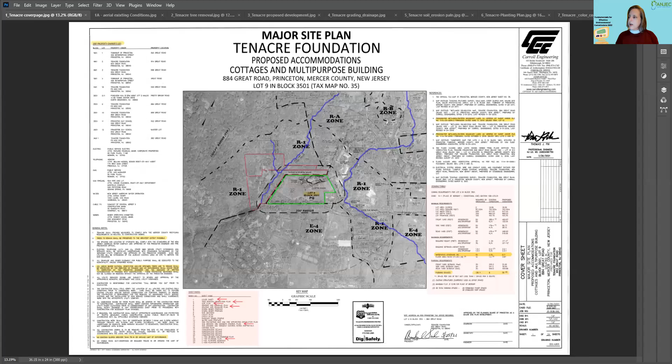So this is a site plan from Princeton that we're going to review this evening. I'm going to give just a little background on the site.

The project is a mixed-use project with education, residential, and office use. The proposed development consists of a multi-purpose building community center with 350-seat seating, 3 residential buildings, a pedestrian walkway, a new access drive, and some parking lot areas. The applicant is a Tenacre Foundation.

They actually have a site. Let me just hold one second here. I'm trying to get a spotlight here.

There we go. Here's the map of where the project is going to take place, in this little green area. This Tenacre lot is actually over here. Let me enlarge this a little bit so you can see it a little better.

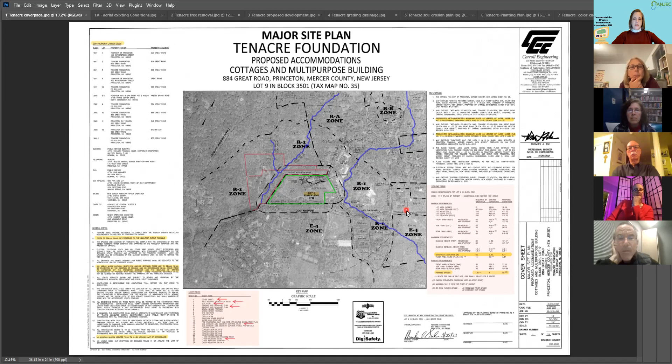This lot over here, they actually have a campus where they have a Christian Science nursing care facility and a school for Christian Science nursing. So they want to expand into this area here for some additional housing for visitors and for educational purposes.

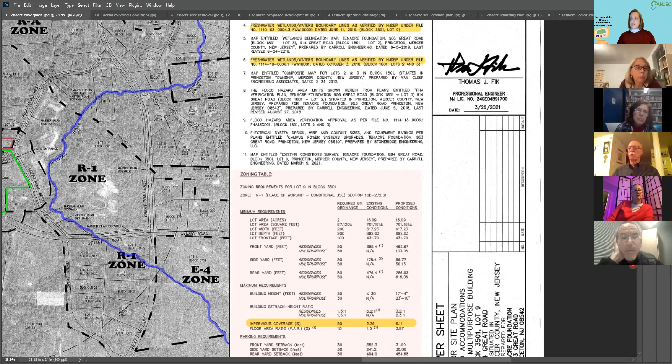So we're going to get into some questions now that I'm going to ask, and I'm going to kind of move you around on this map so we can try to answer those questions. When I pose the questions, if you can answer them, please just unmute yourselves and step up with the answers. First question is, over here on the right-hand side, it tells you what the lot is.

So I'm going to ask: is the proposed project consistent with the R1 zoning designation? Because this is a residential 1 zoning designation. Based on what's here, can anyone answer that question? Would this be appropriate development for this zoning area? Any takers?

Yeah. You said it was supposed to be cottages and like an office building that they wanted to put up? Yeah, cottages, office building, and a multi-purpose building for like educational purposes.

And they are considered a place of worship. They are. Okay, yeah, that's what I was going to comment on. Yeah, okay, yeah, they are considered a place of worship. It's Christian Science, so...

As you can see here, it's zoned R1, which is residential, but a place of worship is a conditional use based on their ordinance. So it is an appropriate development that would be accepted for this particular zoning. So that is the answer there.

I'm going to scroll back out here a little bit so we can move over to the map portion. This isn't a very good map, and I'm going to show you an aerial view in a minute. But the next question would be to look at the map. Do you see any environmental concerns that are actually outside of where the proposed development is going to take place?

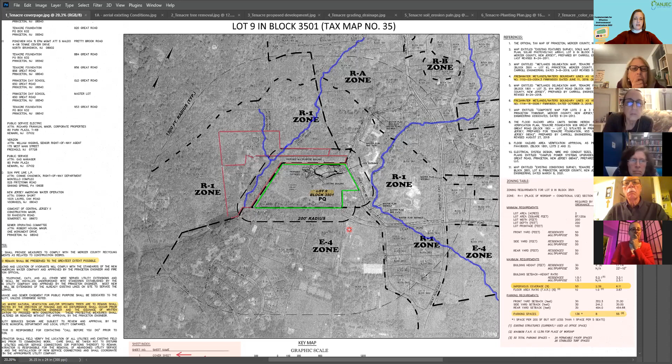I do have this a little color coded to make it easier for you. I'm going to scroll in. If you see me going towards the screen, it's because I have a touch screen, so it's easier for me to enlarge things using my hands. So are there features outside of the lot that you can see that you'd want to take into consideration with environmental concerns outside the property?

Does anybody have any? It's in a watershed of some kind, riparian buffers. Yes, exactly, erosion. So they're very close to a creek. Will there be pollution? Will there be sediment coming off of the development? Yeah, all good points.

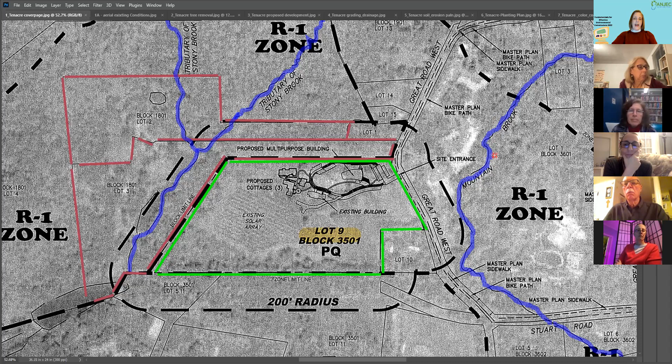Yes, and in fact, there is some, you wouldn't know this just looking at the site plan, but these tributaries, this Stony Brook tributary here, and this Mountain Brook tributary, they actually both flow, although I don't have it completely shown here, but both of these tributaries flow into a C1 waterway, which is a protected waterway, so you don't want any additional pollution going to it. So that is a concern. It's absolutely correct on that.

So you want to look to see if there are C1 waterways in the area, because C1 waterways constitute the need for a 300-foot buffer around waterways that are considered C1, the waterway itself and tributaries to that waterway. So once we get a little deeper into the plan, you want to make sure that there actually is that 300-foot buffer around these waterways.

Is there a legend that shows the scale of this, so that we know how close that is to the waterways? Maybe not on this particular map, because this is just the cover sheet, but when you get farther into the site plan, there are scales there.

But see, the waterways themselves are actually outside of the proposed area. This is something you probably would have to go to an online map for, because the site plan itself is only going to specifically look at what's happening in the development area, which is inside the green area. These waterways are outside of that property. So this is something we see on the overview, but you probably want to look at in more detail on your own using online mapping or other sources that may not be in the site plan itself.

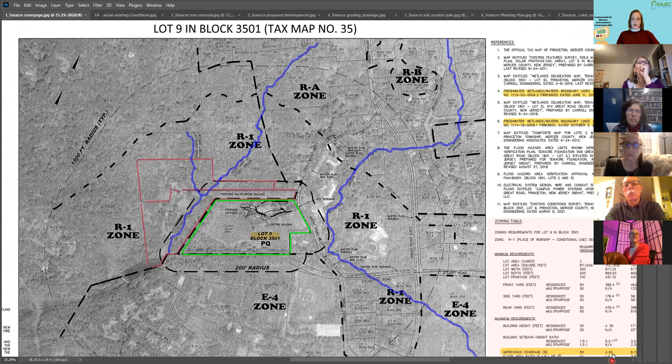Okay, so next question, let's see if I can move over here. Okay, so this is the area where it shows what the ordinances in your town require, what the existing conditions are, and what the proposed conditions are.

So is there anything here where you see that might be looking for a variance for the requirements by ordinance? I made this a little easier because I highlighted some of the areas. So if there's anything you see... Parking is a big thing. Yes, exactly, correct. Right here with parking, there's actually a little asterisk. The required by ordinance, based on what they're proposing in this development, they need 136 spots. They're only proposing to have 55.

So they actually are requesting a variance for this, and they were granted it. Primarily why they were granted is because it's temporary housing there, so they're not going to require as much parking area. Plus, as I mentioned before, they have a campus right across the street where they have additional parking, and they would supply transportation back and forth to this location if there are more people going to the multipurpose building for an event. So they don't necessarily have to have all the parking on site because of the campus across the street. They've been granted a variance for that reason.

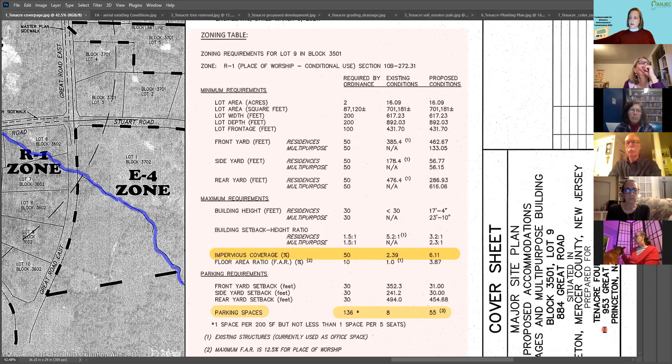Okay, going on to the next thing. All right, let's see, it's hard to do this. Michelle was supposed to be here asking the questions, so I'm trying to both maneuver this and ask the questions at the same time, because she somehow got kicked out of the session.

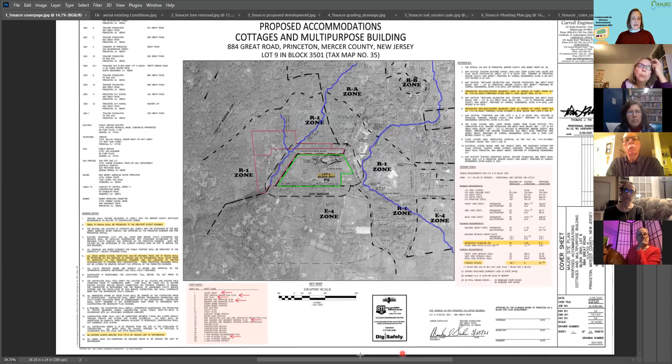Anyways, the other thing you want to look at is whether all the required permits have been obtained. Now, it's usually on the cover page - there's somewhere on here where it shows what permits they need and have gotten.

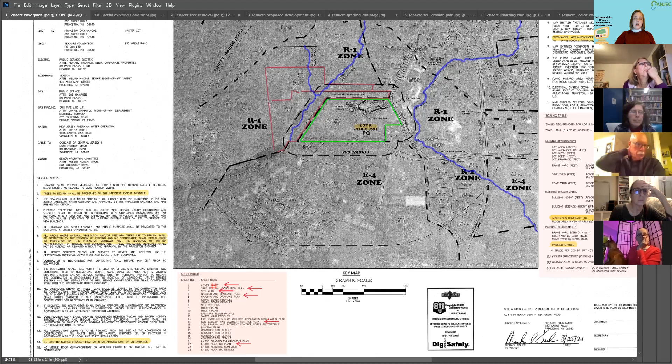On this particular plan, it doesn't show what permits they're going for and what ones they have, because usually that's in the general notes. So this is something you'd want to ask the developer, because if there are wetlands there, they're probably going to have to get state permits to do the development, and it's not indicated on this plan.

The other thing I wanted to point out is, come on, it's scrolling for me for some reason. Let's see if I can do this.

We did mention that there look like possible wetlands in the stream buffer here. It looks like they did get a letter of interpretation, verified by the DEP for the wetland boundaries for the lots alongside the property, which I highlighted here in red. So they already have that in place, so they're good there.

They are a little dated, so they might ask the DEP to go back out and verify that, because this application came in 2021, and these boundaries were verified back in 2018 and 2019. So this is something you might want to verify, having the DEP re-verify those freshwater wetland boundaries.

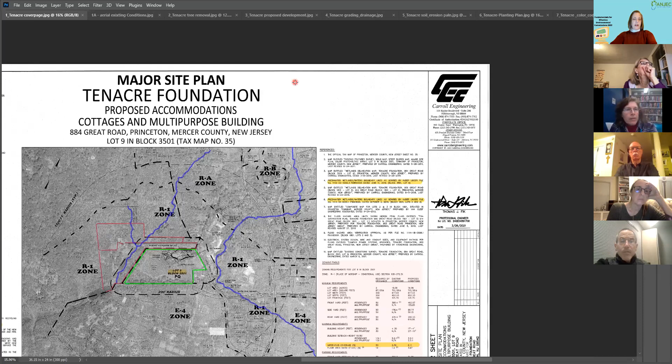Okay, so that's basically the main page, and you can see on the bottom here there are a lot of different sheets that are part of this plan. We're not going to look at all of them. I've selected a few that we'll look at in a little more detail, just to give you an idea of what you need to go through during a site plan review.

All right, so I'm just going to show you this. This is the actual aerial view, a better overhead view of what the site looks like now. There's a solar array as part of the property, an existing building here, a garage, here's the driveway coming in, and there's an existing bioretention basin that's part of the property. So this gives you an idea of what is currently at the site, just a visual for you to see.

Okay, let's go on to the next page. I have to move my questions here. Here we go, all right.

I made this a little easier for tonight's review, as I tried to color code this property. This is actually the tree removal and demolition plan, but it also shows the existing conditions of the site. I'll give you the color coding: yellow is wetlands areas, blue is a bioretention basin.

So the first question is, are there freshwater wetlands on the property? This should be a pretty easy question, since I just gave you the color coding. Yes, there are - all the yellow area. So the wetland on the bottom part of the property here, and up on the northwest and north part of the property here. Let me scroll in a little bit more so you can see this is the wetland area.

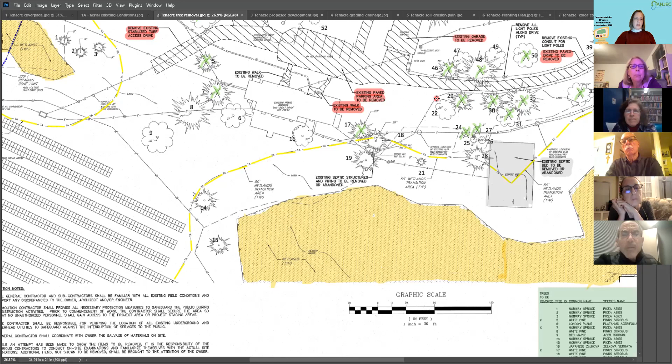Okay, so let me go to the top part of the property here, if I can - come on, scroll. My mouse is not working for some reason. You have to just be a little patient with me, it's a little difficult to maneuver around these maps.

So the other thing is up here, and I already kind of gave this answer away. There is a marking here that's a riparian buffer zone - a 300-foot riparian buffer zone. What would constitute needing a 300-foot riparian buffer zone? I think I already gave it away in the initial front pages - C1. Not the wetlands, it's the C1 waterways. Yeah, for that you need a 300-foot riparian buffer.

Most waterways, like a normal waterway, you need a 50-foot buffer. If it's an exceptional waterway, then 150. But if it's a C1 waterway, you actually need a 300-foot riparian zone. This should be part of your ordinances also, especially if you have a riparian protection ordinance.

It should be stated in there, but these are state regulations also. Can I ask a quick question? Will the site plan indicate on it... I'm totally new to this, I just joined the Environmental Commission two months ago. The only time I do site plan reviews is when I'm presenting this, so I'm not that familiar with them either. Do they normally indicate on them, oh, here's a wetland, here's a C1 category, or do you have to know that those things exist?

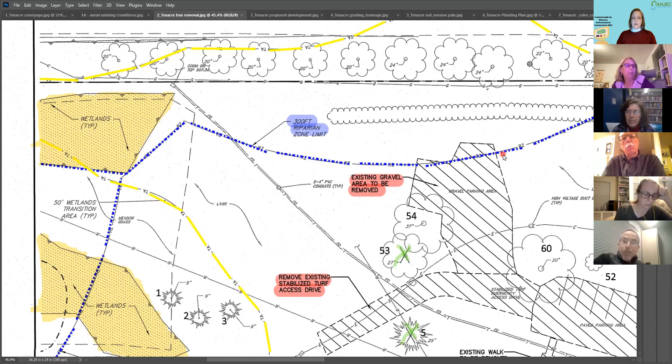No, it should be on the plan. They should definitely have them all in the plan, and this is where, like on part of the plan, there should be... actually, it's not on here. That's weird. Usually on the plan there's the scale on the bottom, the graphic scale, but for some reason on this particular sheet it doesn't have the coding. So there should be somewhere on here that has a box showing what all the designations mean, but it's actually not on this plan, at least not on this sheet. There's no legend. There should be a legend on each of the sheets, but there's no legend. It is missing that, so that's a good thing to point out.

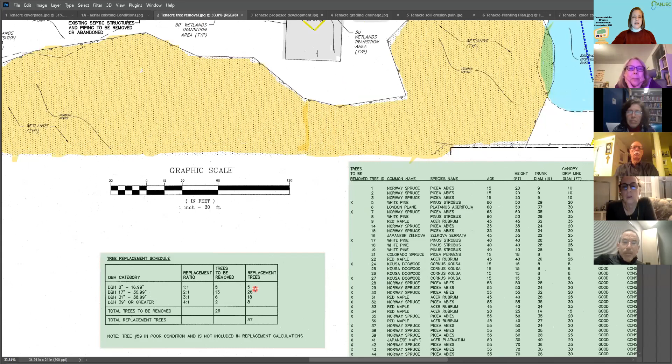But this particular plan actually shows where the trees are going to be removed. One of the ordinances in Princeton, and not all municipalities have this, is they do have a requirement to do a tree inventory as part of the application process. So they did a tree inventory. They have these 60 trees that they inventoried. The X's are where they're actually going to be taking trees down. If there's no X, they're actually going to be keeping them on site, so they'll be protecting them.

And because Princeton does have a tree protection ordinance, there is a requirement to replace the trees, and that tree replacement schedule is right here. You can see that based on Princeton's ordinance, they are required, from the number of trees they're taking down and the size of those trees, to replace at least 57 of them. So this block we're looking at, this replacement tree schedule, is a requirement of Princeton.

Is the other green block next to it also a requirement of Princeton, or is that something else? No, that's a requirement of Princeton too. Princeton does require a tree inventory as part of their application process, and that is unique to Princeton. Not all municipalities require that, but they do have a tree protection ordinance. As part of that ordinance, they're required to have the applicant do a tree inventory for major developments, so they know what's there and what they're going to be removing. Then there's a calculation to determine how many trees need to be replaced. So this is why you need to know what your own ordinances are in your own municipality, because they vary widely from municipality to municipality. Not all municipalities have a tree protection ordinance requirement.

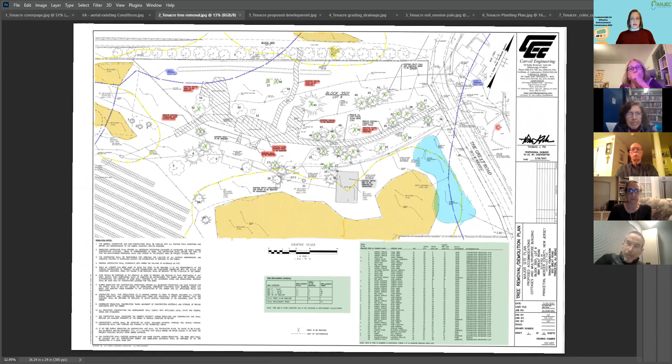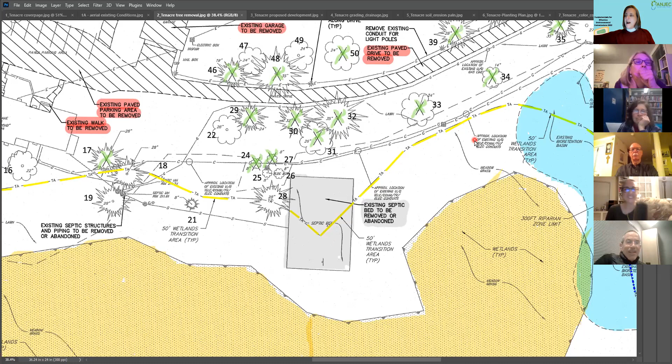Okay, we already talked about the letter, so the other question is, what else is on this site that you see they're actually going to be removing, in addition to the trees located there? They kind of have it highlighted there in the middle. Is anyone... oh, the septic. Yes, there's an old septic system that is going to be removed or abandoned, and this kind of indicates to me, as you can see, there is piping here that's going to this existing building.

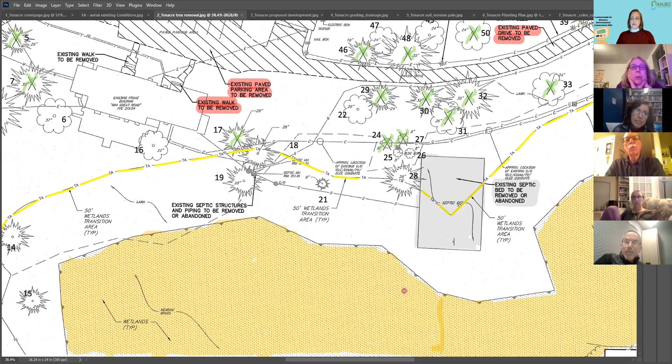So to me, this indicates, and I don't have the background to confirm this or not, that currently there's only septic on the site. Which means if only septic is being used for this building, they're going to be removing that and tying into the regular sanitary system. It's probably not an issue in this location because it's residential and the sanitary sewer system is already there. So they just have to tie in, but you want to make sure they're getting all the permits and that it's all done appropriately, because it doesn't appear there's any sewer system currently on this location.

But we're not looking at something like out in a rural area with farmland, where you'd have to bring a system into the site. The system probably already exists out the road. They just need to get the proper tie-in and plumbing to the development they're proposing.

They're also going to be working in this other area that's tagged here, which is also where the current paving is. They're going to be removing all this and putting in a new driveway area. So that's just to note.

All right, let's go on to the next page. This is kind of the bulk of the site plan, what they're actually proposing to put in. Over here on this part of the plan, they're going to be putting in these 3 cottages right here, and they're going to be putting in this multi-purpose building right here. This existing building is going to remain. And then there was a small building here that they're actually going to be taking out.

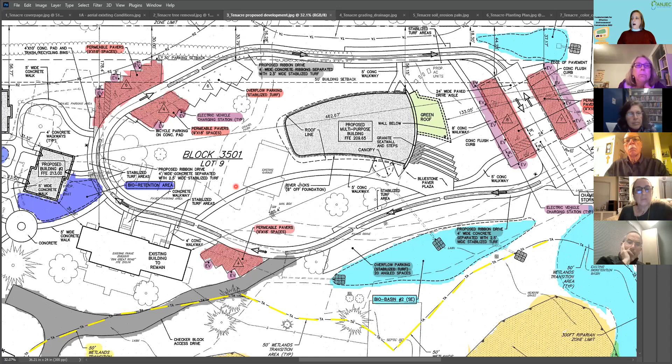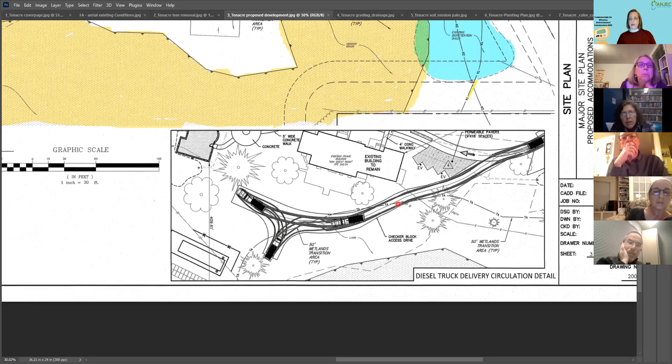Okay, so again, let's look at the freshwater wetlands area, specifically down in this area. This is something I actually mentioned in my talk also. If you're going to be disturbing that transition area, like they're planning to do here, they're putting in this little driveway area, which has a little insert down here, where trucks making deliveries will come in, pull down, make their delivery, do a 3-point turn and go back out to the main road. So they're not going around the entire property, just stopping to make deliveries. But this roadway they're putting in obviously disturbs this transition area.

What needs to be done if you're going to be disturbing that transition area? The answer is mitigation—you have to compensate for it. Do you see anywhere on this map where they're compensating for the loss of this transition area of this wetland?

They're putting in another bio retention system on the right-hand side where it's blue. That's a bioretention system, not compensating for the transition area. You need to add this transition line that's here.

This is all 50 foot, 50 foot, 50 foot. If you're taking away this area, you need to add that transition area somewhere. So this area over here might become 75 foot or whatever is required based on what you're losing here. This wetland transition area should increase somewhere along this wetland to compensate for the loss right here. That's the one thing in this plan that is missing. So that's something the environmental commissioners reviewing this would ask the developer to add—additional transition areas so there wouldn't be any encroachment or development in another area to make up for this loss, because they're encroaching upon it. That is not on the plan.

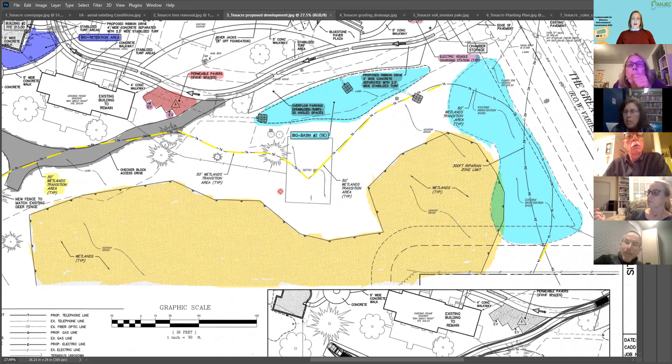Randy, does it have to be in the same plot of land to do the compensation, or can it be somewhere else? I don't understand at all the compensation part.

Well, that's a good question, and I wish I could have had an answer for you because I actually wanted to find out myself. I'm not positive, but nowhere on this site are they increasing this transition area. So over this wetland, it's all still the 50-foot transition area. Basically, you want to try to protect that wetland more, so there's more of a transition area, so you're not encroaching—protecting the water quality, so you don't want encroachment of development in there.

So if you're losing it here, you want to add it somewhere else so that you maintain the same area basically of the transition, even if it's not in exactly the same spot.

So let me ask a question. The roadway that they have indicated there says checkers, so that is grass pavers? Not here, not this part, because this is going to be the road. This is for trucks. It said checkered pavers on the note, but not for this roadway here. This is for the parking area they're putting in permeable.

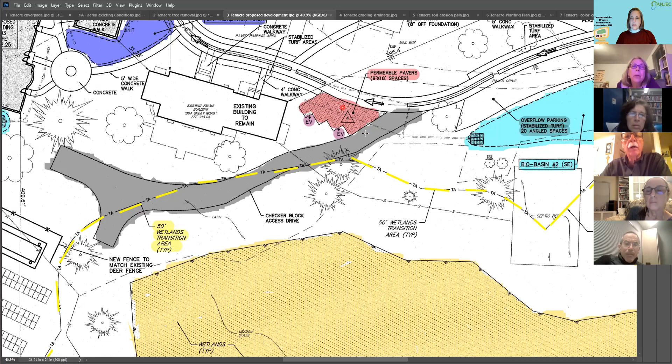Oh, no, but here, I see. Checker block access drive, checker block. There is, you know, but they're still encroaching upon the wetland area. They're still, I think they still need to compensate because they're putting it in.

Randy, when you say compensate, in this particular case, nothing is being added, they're just redrawing a line, which means nothing can be developed inside that line, but they weren't going to develop anything inside of the line anyway in that area. So how is that? Am I right?

They would just take that yellow line and redraw it so that it's wider than the 50 feet. So in essence, they're getting some paving over that area, but they're just redrawing a line in order to get it approved. So how is that helpful to the environment in terms of mitigating the new impervious surface? Do you understand what I mean?

Right, so you're taking away the protection here, but you're adding the protection over here. Right, that's sort of like, so what? Because they're not going to go in there and plant different plants or anything. They're just redrawing a line on a map, but it's going to look exactly the same.

Am I right? Yes, but if you're mitigating the transition area, you might then be required to have additional transitional wetland planting put in at another location. I was wondering what the real world solution for that was, because at first I understood it to just be redrawing a line and don't go inside that line. But if you're just redrawing the line and not doing anything else, that's not enough. You would have to add additional transitional wetland planting over in the other area where you're compensating for the loss of it over here. So that would be part of the requirement.

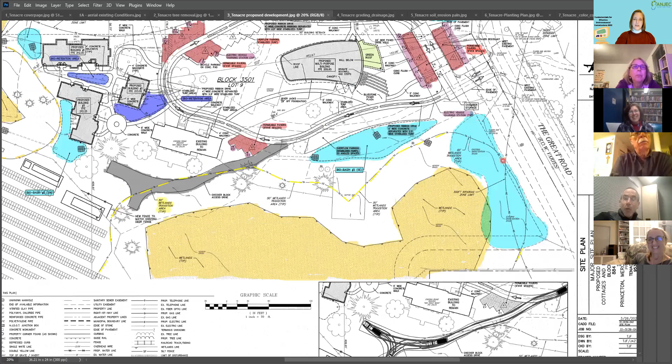Oh yeah, that could happen because they see a nice green area near the housing and want to put something down there. But now they won't be allowed to, because it's part of the transition area on record. Yes, that's true.

Okay, let me see what else is next. Now Chris did talk about this, and you can't tell all the mathematical equations just from looking at this, but looking at where they are putting things, all these little blue areas are new stormwater basins, small stormwater basins they're going to be putting in. This one already exists, so they're putting in 1, 2, 3, 4, plus bioretention basins here, which are basically your rain gardens. You're putting a rain garden here, a rain garden here.

They're also putting in permeable paving parking areas right here, here, all the red areas. Just by looking at it, overview, do you think this is probably going to meet the new stormwater regulations that Chris was discussing in his part of the presentation?

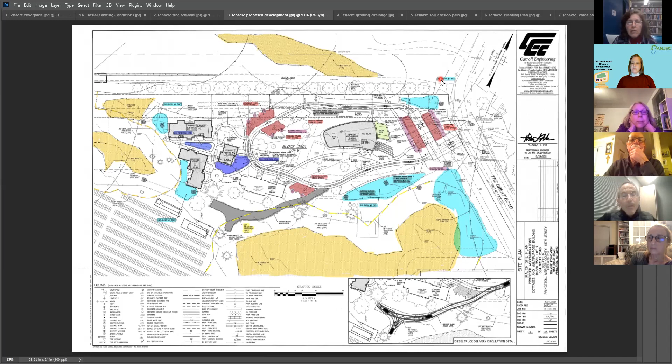Any comments? Yes, Karen. I do, although this map doesn't show the topography, so I can't make out on this particular survey where the water would flow. But it looks like the flow is going to show up on the next page. Actually, it does show the flow.

But just looking at the number of locations they're putting in, do you think it probably will meet the regulations? I do, I think so too, because they're not putting in one large basin. They're putting in multiple small basins, green infrastructure basins. One thing you'd want to look at in more detail is how they're actually constructing this, and whether there's going to be correct infiltration and recharge into the ground from the flow going in here. Is it going to handle the 2, 10, and 100-year storm?

You can't really tell that from this map, so that's something you'd have to go into more detail to make sure it's actually going to meet those requirements for quality, quantity, and recharge that Chris talked about, very quickly, in overview in his presentation. I know he went through that quickly, and there was a lot of information, so it's going to take time to absorb all of it.

But for small scale bioretention systems, you're only allowed to have drainage of 2.5 acres into those small scale infiltration basins. Same with pervious paving systems, as well as rain gardens. And there is definitely less than 2.5 acres, based on what you're looking at here, flowing into those particular systems. So I think it does meet those requirements.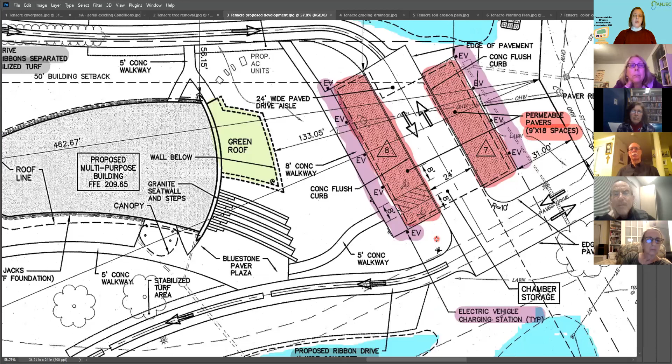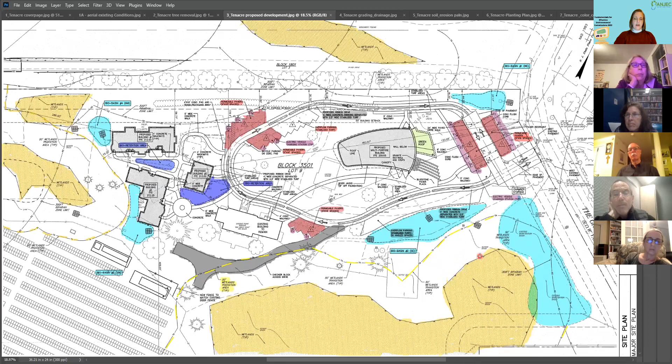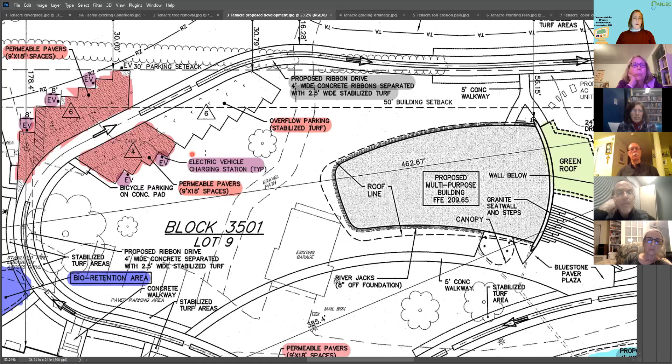The other thing I wanted to point out, I mentioned having a little trouble getting this larger. I mentioned the new EV charging station requirement, shown here in purple. So they're putting in EV charging stations, and I believe I said they're putting in 55 parking areas. Some will be in these permeable parking areas, and they actually have an overflow parking area here, which is just going to be stabilized turf for overflow. But if you look at the total parking in the permeable parking areas, essentially about half the spots are going to have EV charging stations. So that more than meets the requirement of the DCA ordinance, the state ordinance.

So, Randy? Yes. I see these little grid-like square things in the bioretention basins, the blue-green color. Can you see them? What are they on the legend? Every single bio basin has at least one of those little grids.

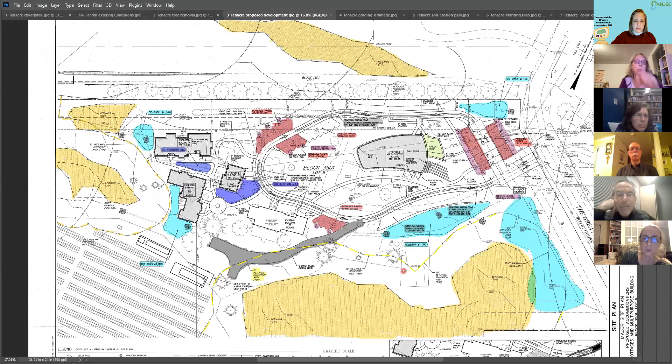In the blue-green areas, that's where the flow comes in. It's like rocks basically, coming in to prevent the flow—that's where the scour protection is.

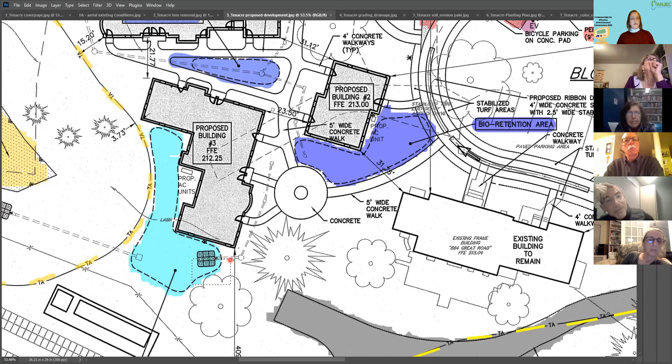So the flow is going to be coming in here, but they have basically a riprap or whatever to reduce the flow coming in. Those other connected things might be underground pipes with drains—we'll get to that.

Let's try to finish up in about 10 minutes or so. I didn't realize how late it is, but this is shown on the next page in a lot more detail, and this is where you see the flow.

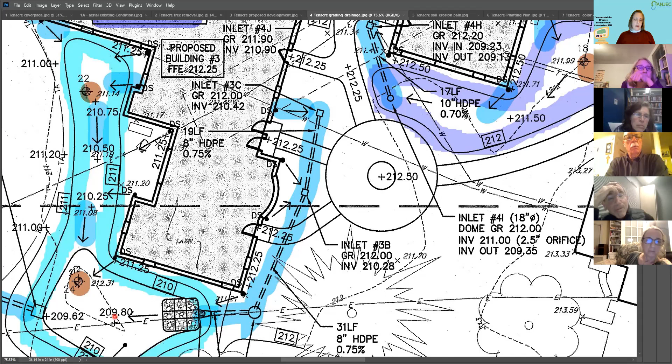The flow of water coming off the building is here. It's going to be piped down here and then into this bioretention area. Then the outflow from it, if it gets too high, comes out here, goes down here and out towards the wetland area. So if it does overflow, we have an outflow here.

I'm going to try to go through this a little quick since I didn't realize the time. But you can do that for all the buildings—the flow is going to be coming into these biobasins, and for this particular area, these are the rain gardens.

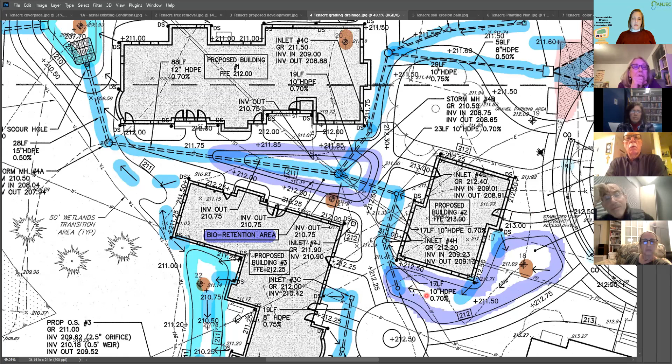There must be an underflow from the rain gardens that connects one rain garden into the next. This underflow goes out to this bioretention area here and then out towards the wetland for overflow. So this is the flow chart that I think Karen referred to.

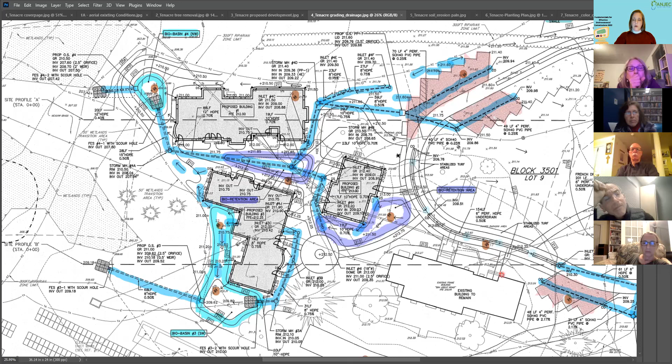It shows where the surface water flow goes so you can follow it. The other thing I want to point out are these little brown dots, which are where they're putting in soil pit testing. Does anyone have an idea why it might be important to have as many soil pit tests throughout the site as shown here? Any thoughts?

Well, for instance, you need to check the rock infiltration and permeability—that's true. You want to make sure that the feature you're putting in is actually going to function, that the water is going to flow down. It also allows you to look at the soil layers to see what types of soils are there, and get a more detailed analysis of the soil at that location.

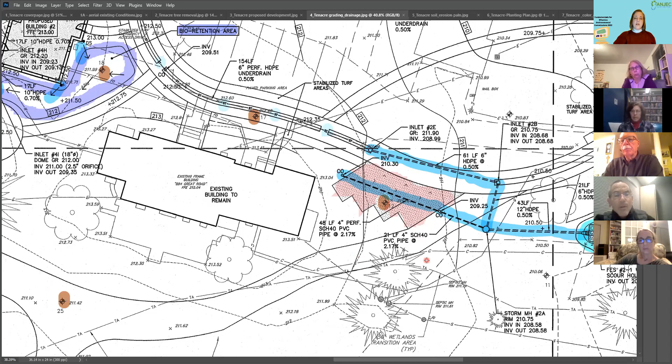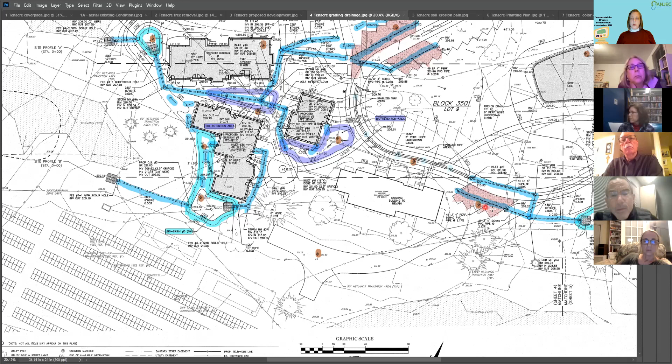There's a significant number of them, located where they're putting in the retention basins, the rain gardens, and the parking lot, so it looks pretty good. There's also this ribbon drive they're putting in, so they're putting in some soil testing sites in that location too—that's where the drainage is.

So does it indicate where the water table is? It does not, and that would probably be part of the stormwater plan itself—it would not necessarily be indicated on the site plan. So there's other documentation you might want to refer to, because that is definitely important, especially when looking at some of these locations.

For permeable paving, as Chris mentioned, you need to have at least 2 feet between your underground feature and the water table for it to be effective. So you do want to look at that information, but it would not necessarily be indicated on the site plan itself—that's additional documentation you'd want to check when doing your site plan review.

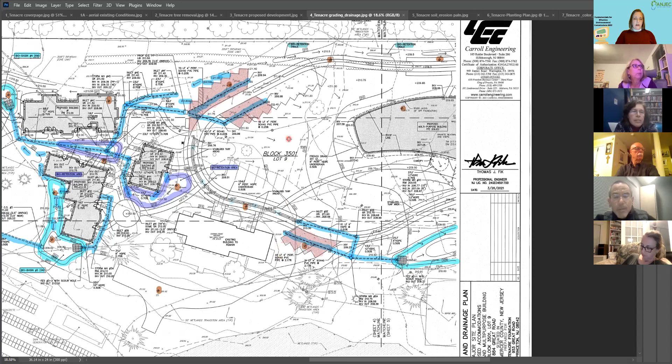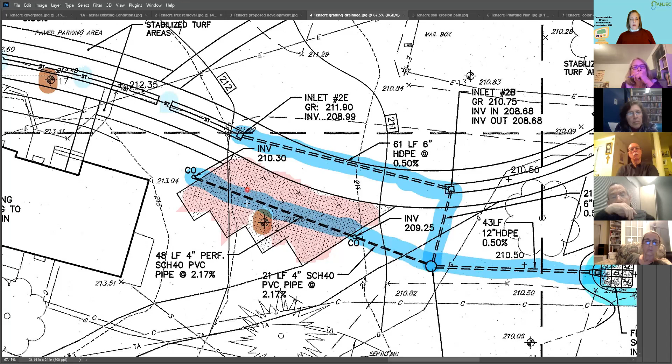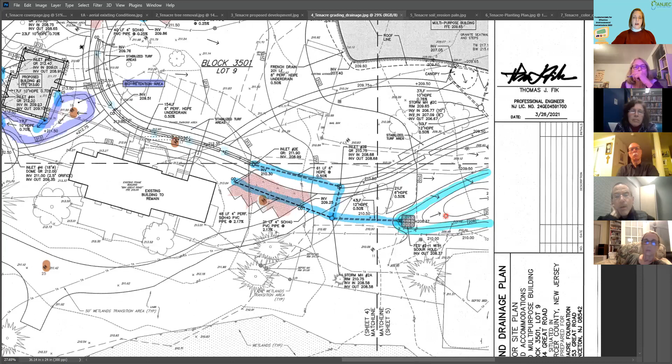Another thing they have underneath this ribbon drive is grass in the middle, but underneath the grass there's piping where water is collected for runoff from the ribbon drive itself. It's also connected to the underdrain from this permeable parking, and it flows out to the bio basin they put in here. So it looks like they've done a pretty good job, from my layman point of view, on the site plan with regards to stormwater runoff flow.

This is just the erosion plan, which I want to quickly touch on. They're going to have two stockpiles of soil during excavation. They're putting protectors around the trees they're keeping on site so they aren't disturbed during construction. They're putting in a stabilized construction entrance for vehicles to come in, and a silt fence along the entire property to prevent erosion during construction.

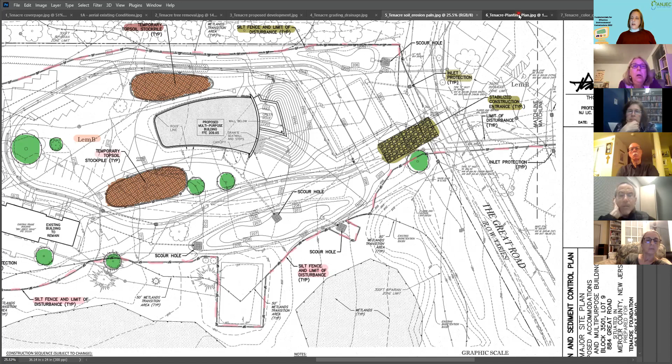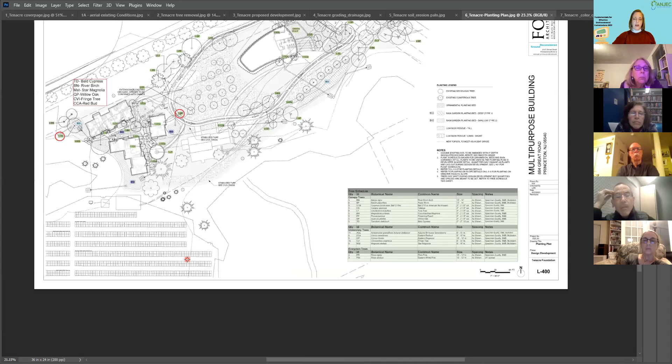I'm going through this pretty quickly now. The last piece is the landscape plan. These are the trees they're proposing to put on site. I added them all up and it comes to 109 trees. I mentioned on the first page they were only required to put in 57, so they're more than compensating for the number of trees they're taking out of the site, almost doubling the required number. The thing you want to look at is where the trees are being planted and what types of trees.

For instance, I had an issue right here. This is a bio basin, and they're putting a tree in it. What type of tree is it? Based on the legend, it's a bald cypress. Bald cypresses are native, they're a great tree, but I don't know if I want them in the middle of my bio basin because they get huge, and down the road that may affect the bio basin's ability to function if you have a huge tree in the middle of it.

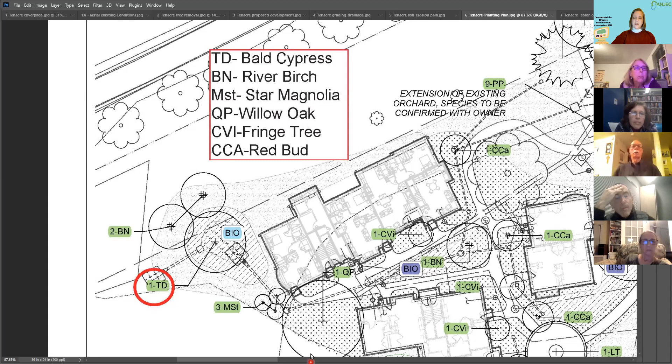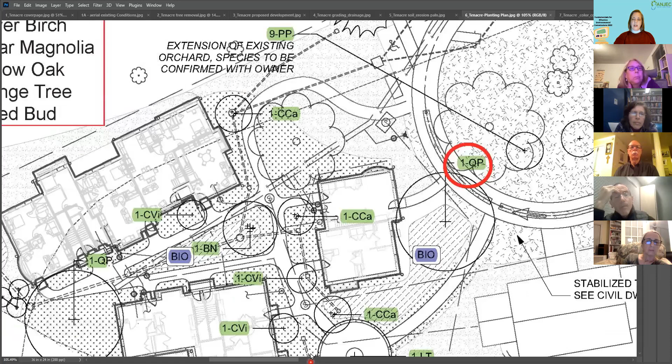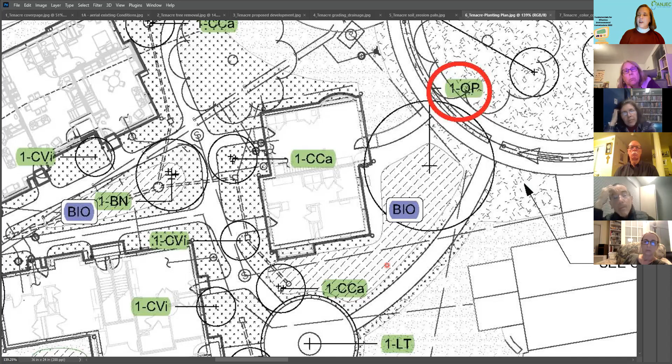The same thing over here - there was another place. They're putting in, right in front of this rain garden, a willow oak. I love willow oaks, one of my favorite trees, but they get huge and produce a lot of shade. If you're putting plants in your rain garden that require sun, that might be a problem. So you need to look at the location where trees are going in and what size they'll get to upon maturity.

One additional thing that wasn't indicated on these plans - they're putting in rain gardens but didn't specify what type of plants are actually going in them. You want to make sure they're the appropriate plants, with wet-loving plants at the bottom of the rain garden and drier, slope-tolerant plants going up and on the outside. It's not detailed enough to determine if they'll put in the correct planting, and it's something you'd want to ask the developer.

I went through that last part pretty quickly without asking questions, but I just wanted to point some of those things out to you. Just a quick question about the trees.

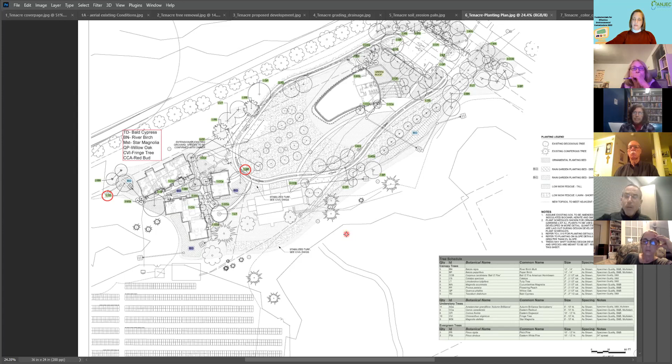I would have actually responded a little differently, because what I learned is that the larger the tree, the more water it intercepts and infiltrates, and also evapotranspirates. That's true, but if you're collecting water in there and it's taking up space at a certain depth, you might lose capacity for the amount of water going into that - that could be an issue. It may not be a problem, it's just something to be aware of. I think some of those trees were also located in areas with underground piping, so you want to make sure a huge tree isn't going to affect the underground piping for the flow.

Yeah, it may just fill up the basin, since these basins are supposed to be a certain depth. If you have a huge tree, you may lose that depth and the volume needed to actually collect the water. So that was my concern when I saw that there. It may not be an issue, but it's something to be aware of.

Any other questions or thoughts? Randy, Cheryl, I have one question.

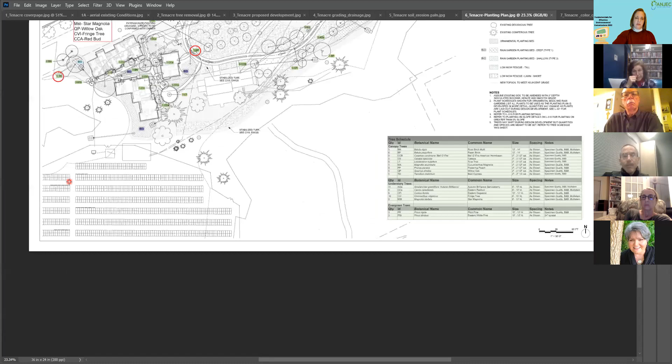Along the tributaries, would you be looking at the slopes going into those tributaries and what is planted along them? Since they're going to be replacing trees, would that be somewhere they should be looking at?

Yeah, I think so, definitely. You need to look at where trees are being put and what varieties are being used, whether they're appropriate for the soil conditions, and if they're planting in transition areas near the wetland, making sure they are compatible with those areas.

Randy, where would they document the maintenance plan for all this green infrastructure? Is that part of the site plan, or is that some other document? It would be another document. The site plan we're going through is basically just the CAD drawings, so that would have to be included separately.

There should be a separate maintenance plan provided with the application. As I said when I showed that original Princeton application, there's a lot of documents that go into an application process, not just the drawings themselves, which is the only thing we're really focusing on right here.

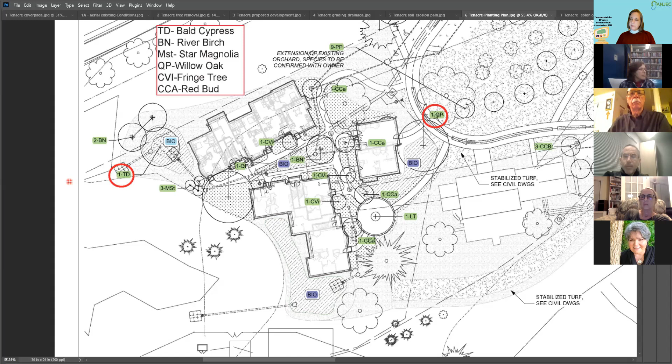So have a good night. I hope this was very helpful. You ran that very well. Thank you. Good to see you. Glad. As I said, I'm not an expert on this, it's just, you learn as you go.

And you can't always do everything, you have to start somewhere, and sometimes it's easiest to start with just a landscape sheet and then work towards the other pages, which can be a little bit more complicated to review and analyze. That was really good.